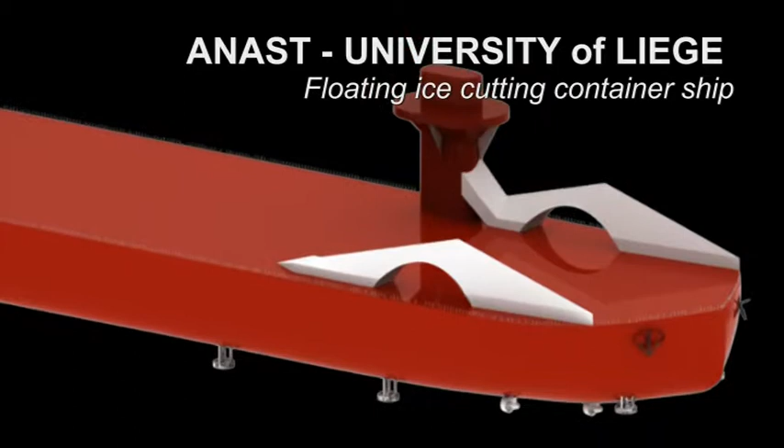Chalmers University of Technology, the potential role of urban waterways in sustainable urban freight transport. Shortlisted contributions.

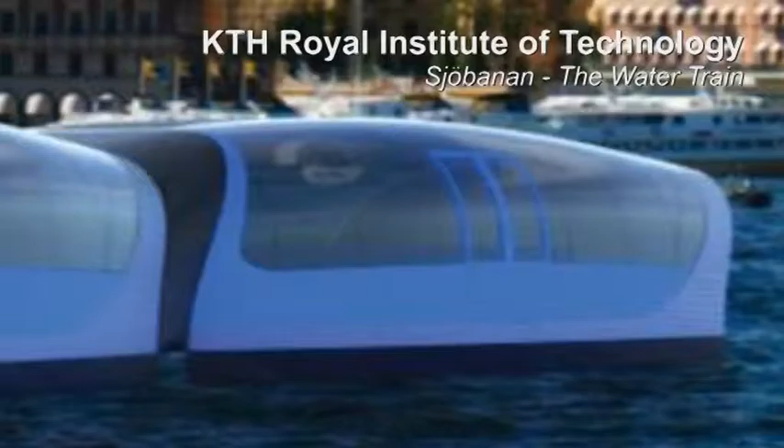KTH Royal Institute of Technology, Sjöbanan, the water train, ICAM, using a vertical axis wind turbine for better energy utilization of cargo ships. Chalmers University of Technology.

Field Development Floater, Coventry University. Trimaran high-speed cruise logistics ferry, University of Newcastle upon Tyne. Wind farm operation and maintenance vessel, Universities of Glasgow and Strathclyde.

Deep V catamaran cruise ship, University of Applied Sciences Bremen. Small crew tender vessel for offshore wind parks. Winner contributions.

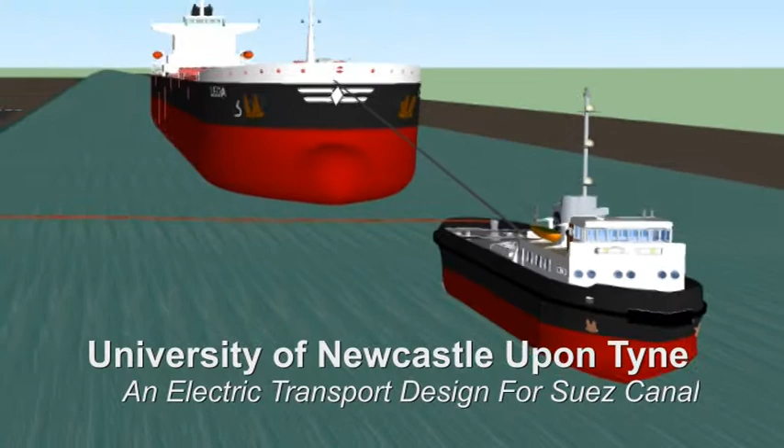University of Newcastle upon Tyne, an electric transport design for Suez Canal. University of Liège, robust design optimization for operational profiles. University of Applied Sciences Bremen, green offshore crew tender concept.

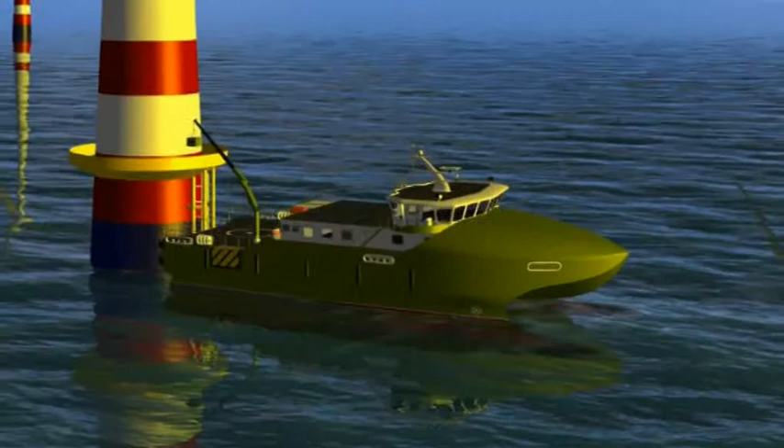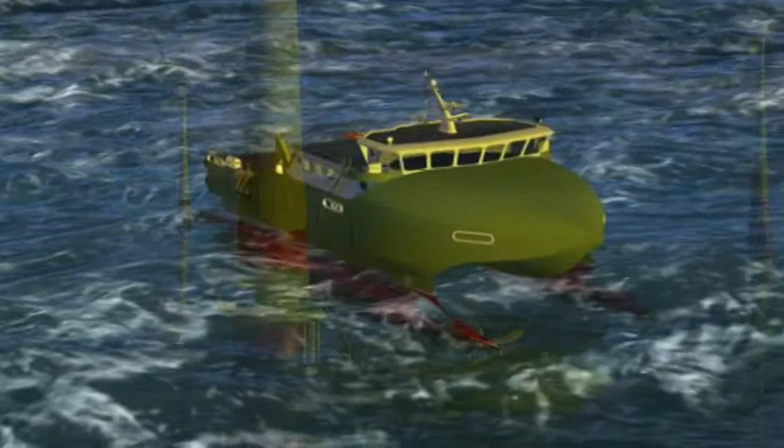Waterborne, first place: green offshore crew tender concept. With the increase of installed power offshore from European coastlines also comes an increase in the demand for maintenance of the wind turbines. The green offshore crew tender concept therefore describes how the transport of the maintenance crew can be performed as safely as possible.

Special emphasis was put on a design that performs perfectly in the rough working conditions of the North Sea while dealing as little damage to the environment as possible.

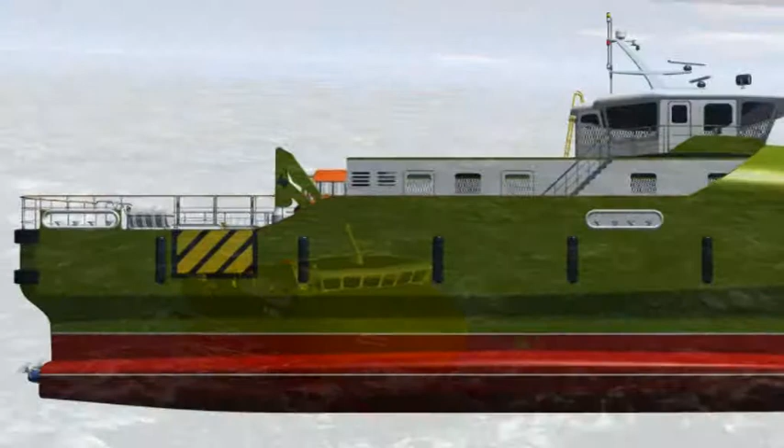The design features a hull optimized for minimum wave resistance and favorable seakeeping characteristics in adverse conditions due to the variable draft. This was achieved by combining the seakeeping abilities of a SWATH hull with the speed advantages of a catamaran for a unique underwater hull.

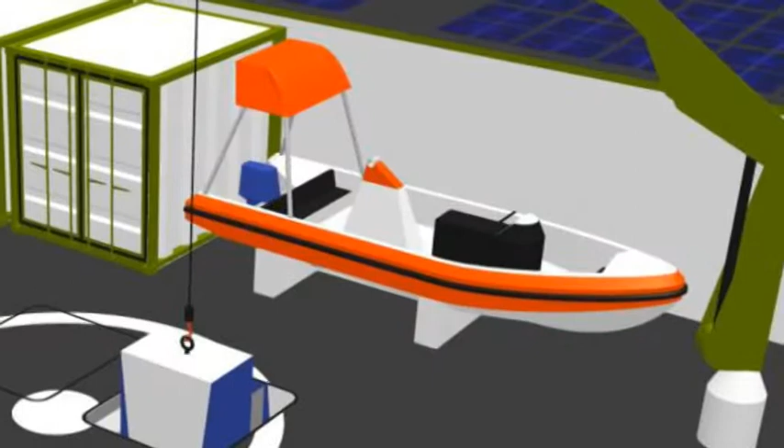The proposed LNG electric hybrid propulsion system and additional solar power generation support the green idea and provide the option of emission-free operation within the wind farms. To protect the maritime wildlife, this offers a considerable potential for the reduction of noise pollution.

Waterborne, second place: robust design optimization for operational profile. Lots of effort has been put into the development of environmental friendly devices and technologies to reduce ship emissions.

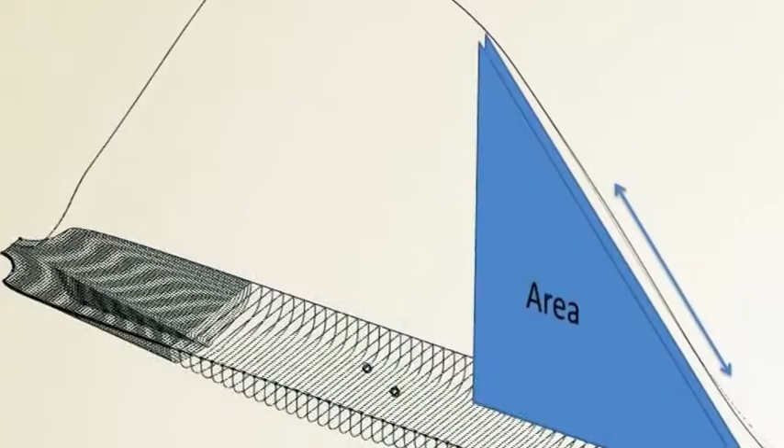Unfortunately, the traditional way of designing a ship only considers one defined mode of operation. As this is far from reality, a design that performs optimally in various conditions can therefore lower the overall emissions even more. Various methods were looked at to achieve a more robust design for a RoPax ferry.

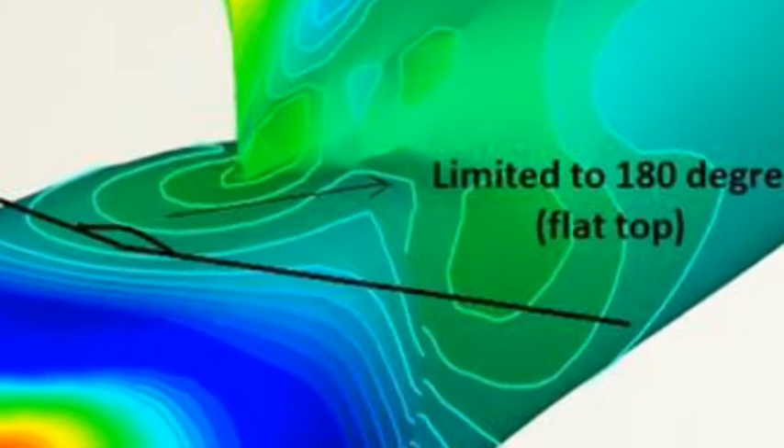Amongst the multi-objective optimization and the weighted different objective optimization, the single objective optimization with constraints proved to be the most rewarding. By running the optimization process, a maximum improvement of the wave resistance of 8.31% was reached.

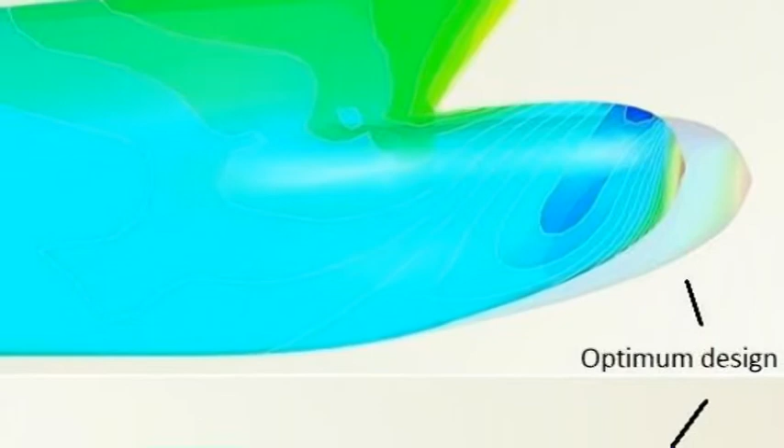After viscous effects were introduced, a total resistance reduction of a maximum of 2.84% was achieved. Overall, the study proved that there is a fuel-saving potential that can be used even for well-designed ships if the design is set up more robustly.

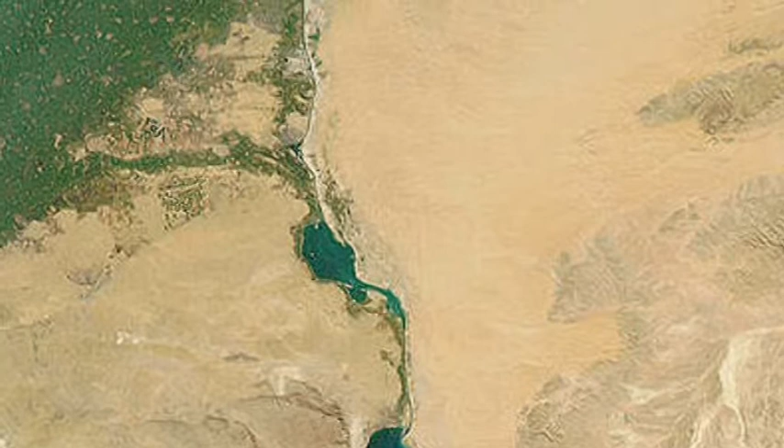Waterborne, third place: an electric transport designed for Suez Canal. About 70% of ship emissions occur within 400 kilometers of coastlines, causing sulfur emissions, particulate matter, and other various environmental problems in air quality through the formation of ground-level ozone.

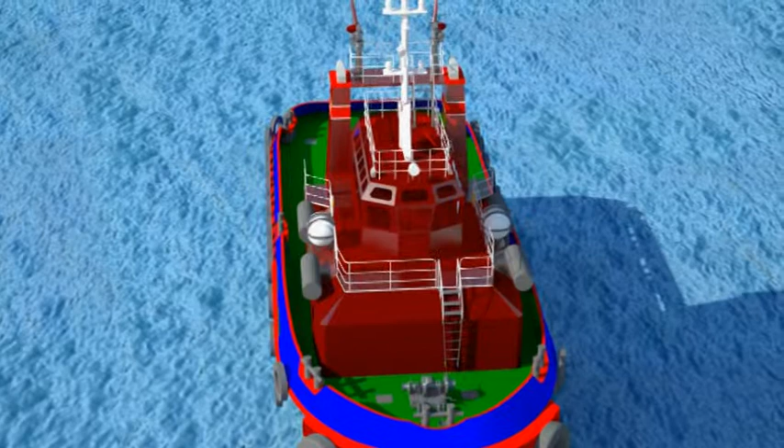When passing through the Suez Canal, the slow-speed diesel engines have been proven to produce higher NOx, SO2 and other harmful greenhouse gases due to the increased combustion residence time in high-pressure values which are related to slow speed limits of the canals. This can be avoided by towing the vessels via all-electric tugboats powered from shore through a high-voltage power cable.

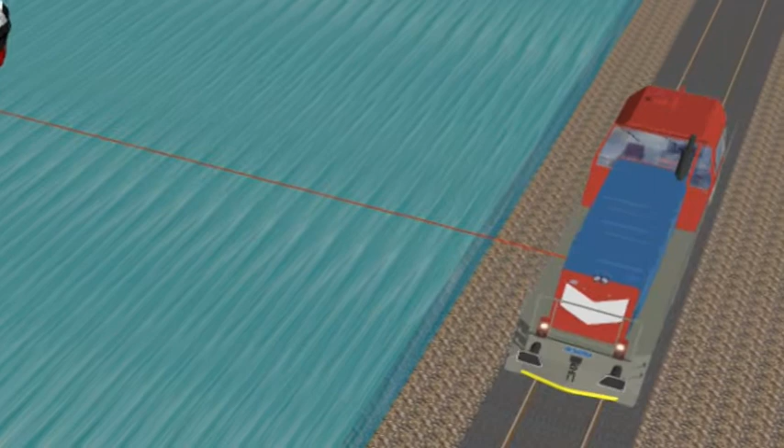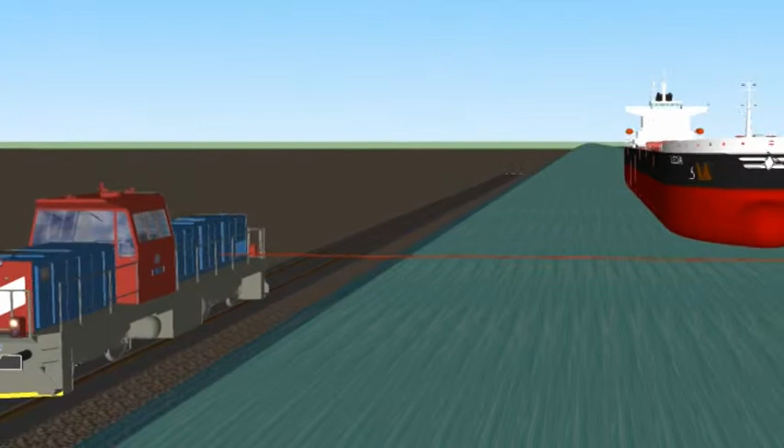Specially designed locomotive vehicles running alongside the canal will transmit the required power through the festoon cabling system to the tugboats. The power supply is possible with solar collector farms so that the implementation of this system would not only improve the air quality in the area of concern, but would also bring along many socio-economic benefits for the entire Suez region.